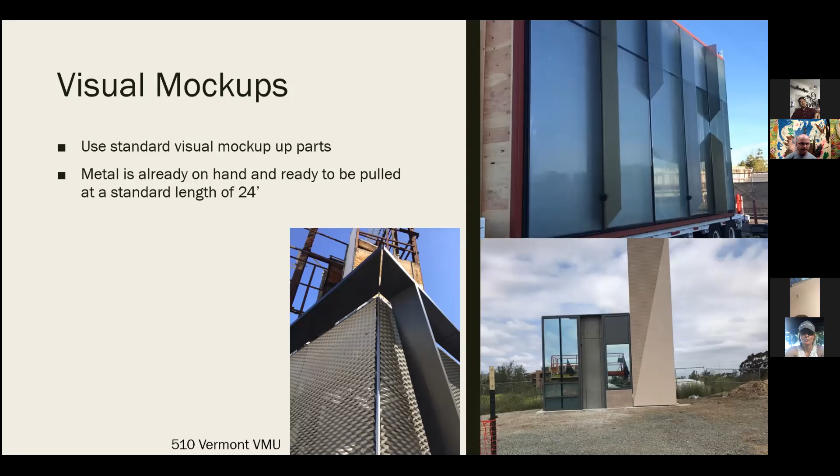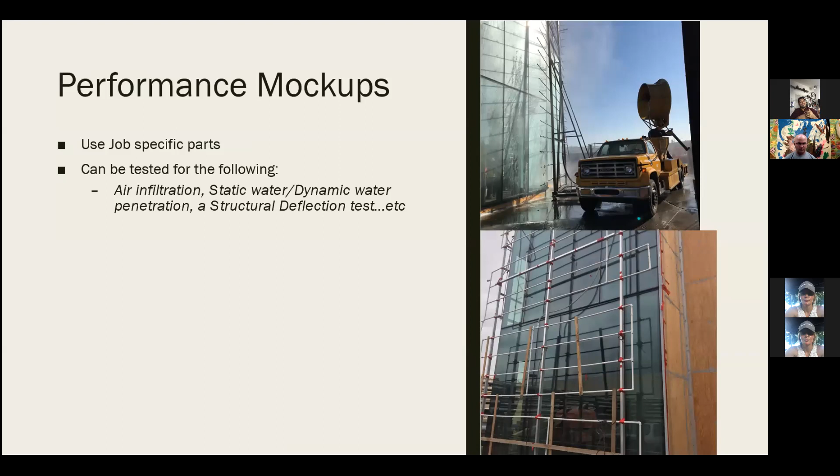So performance mockups use job specific parts. I couldn't find out which jobs I pulled these from, but here's one that's getting water tested, and they can be tested for the following: air infiltration, static water, dynamic water penetration, and structural deflection. And like I said, we try to carry as much information from these PMUs or VMUs with job parts over to the job. And then here's, I think this is O Street being tested out there.

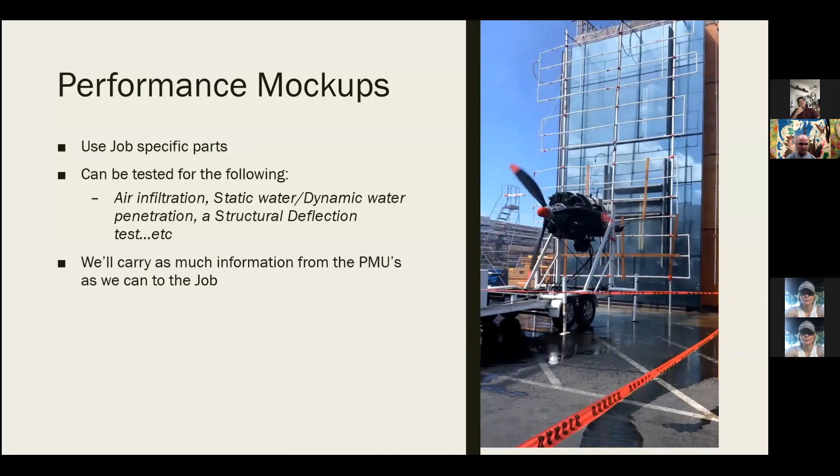And okay, so a comparison between mockups and jobs. So in a job, there's a pallet schedule, which mockups don't have, prototype units, metal and miscellaneous takeoffs, glass takeoffs, and fab. So each of these processes and steps gets handled possibly by a different project engineer. So there's a lot of work that goes into building up to that job.

And for mockups, there's a chance that nobody's touched it before the project engineer that's going to start on it. So that means that you have to start from the ground up, build the takeoff program, build the units, build the field use, and possibly build any brake shapes and anything of the sort if there's no other resource available at that time.

Okay, so an important thing to note is where those files that you need to start off are located. So if it's an LA job, are the shop drawings in the LA server? Are they in the J drive? Is there a Bluebeam session already set up for it? And if there's any doubt on where those files are located, the most up-to-date current, sometimes there's more than one mockup for a job. So I always talk to my PC, or maybe even reach out to the drafter just to see where all the latest and greatest information you need to get started is at.

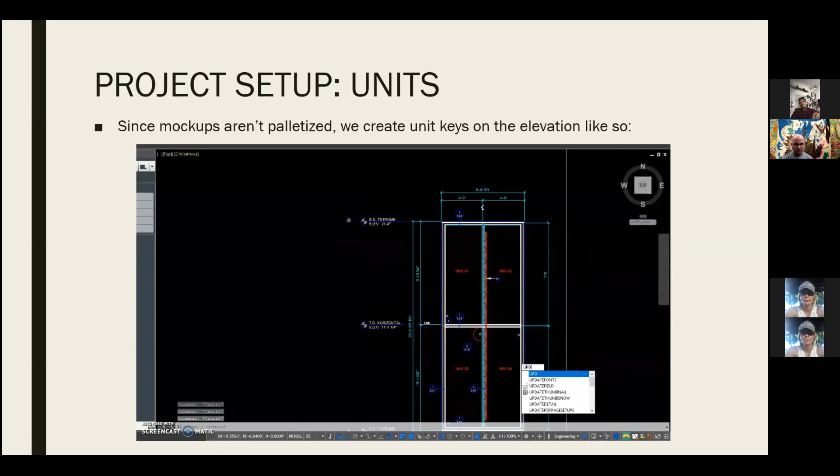Okay. So, the project setup for the units. We have different ways of grabbing information. I've created a standard visual mockup takeoff program that I've basically been building and working off of since I started building mockups. And as you can see on the description there, I have just a little note on what job I've used it on.

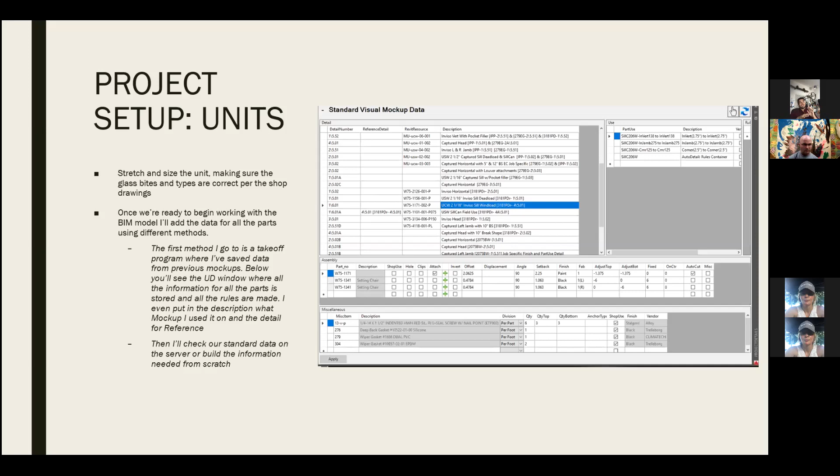For instance, that top one, 1552, I've used it on 279 East Grand, 3181. It's been a long time, I don't remember what job that is, but I used it on 3 different jobs. So I'll reference that if I need that particular detail. Or if I don't have it already created, I'll look for other mockups that I or someone else possibly worked on, and continue to build off of that and grab that information. And if no other information is available, we'll start from scratch.

Okay. And so the release process. As the unit fabs are being checked with metal and glass alongside them, and I believe we do this for the job as well, I'll go ahead and check my own miscellaneous. I'll create a little snippet of the general note sheet and go through each one, marking it off if it's on the shop drawings or not.

Sometimes there might be a fastener missing, a setting block missing, or something. Or maybe I included something on my miscellaneous that's not on the general note sheet. So I'll write a little note on there letting the PM know, if they were to look at it, that this is why I added it, it's on this detail, and so forth.

And for the release process, since I have quite a bit of time. Yeah, oh yeah, I have a lot of time.

So I'll go ahead and show the steps on doing the metal order and possibly the glass, and even the fab, since there's a lot of questions I get asked whenever someone else happens to work on the mockup. That way it's all clear, we're all in unison here. So let me go ahead and minimize this and open up my Takeoff program. Right now I have the standard visual mockup data open,

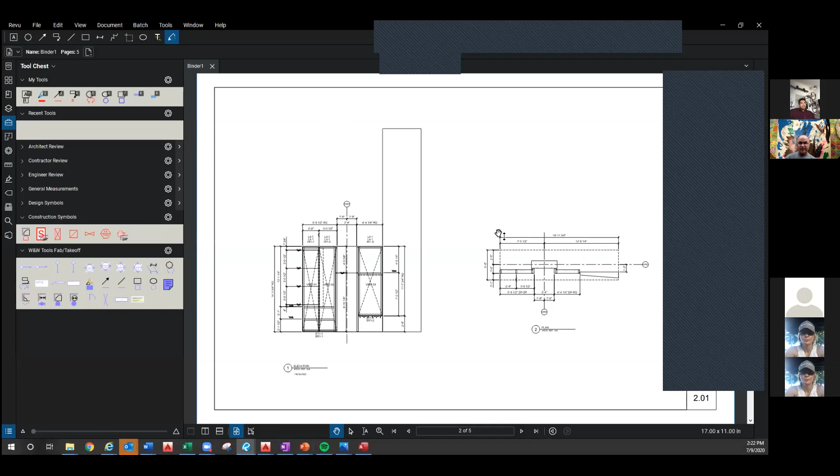So Edgar, can we talk a little bit about the visual mock-up system? You did mention that there's a specific set of drawings that you use. So do you have that available? Maybe we could look a little bit at that system and do some comparisons on how that is similar but very distinct from using actual job parts. Sure thing.

So here we go. This is it right here, the standard visual mock-up standard details. As you can see, even from the head here, we have this little alligator clip part, and all of it is just to mimic the actual job conditions, even though we might not use this part for the job. So we'll go through each detail and see the differences.

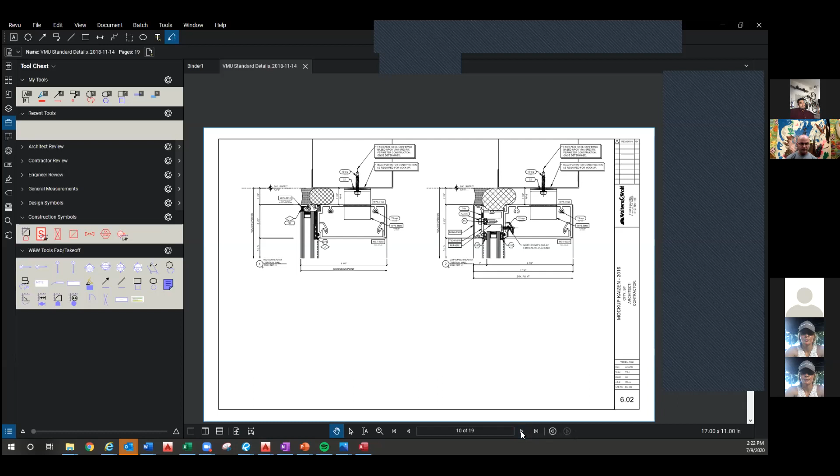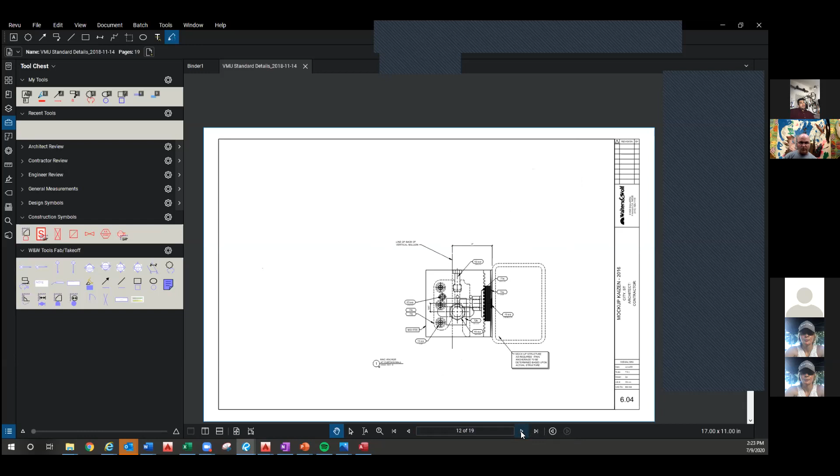So here we go, all pretty typical other than this sill here, the same as that head. On both conditions here, we have that alligator pressure adapter. So let me point out a few things. Go ahead and go back to that previous sheet.

The regular job material has isobars built into it, and that's a limiting factor on being able to paint materials after they've gone through the extrusion process. So we developed the visual mock-up system with a specific set of parts that we could stock. All of the mock-ups are done in the Laverne shop. They're close to Certified there, so we can send the fabs to their shop. They can get the material gathered, sent to Certified, painted, brought back to their shop with a very quick turnaround.

So we developed the visual mock-up system to be able to mimic the look of our W75 system, because in our previous iterations, we were always doing things like tubes and angles and channels and ripping parts, and the results we would get out of that were really inconsistent.

So we wanted to use something that simulated the look and the size and our approach for how the real W75 system works, but we had limitations from the actual parts of the W75 system. In order to create that quick turnaround cycle, we needed to generate these as parts that we could paint without having that isobar in there. So that's how this system came about, where it's got these little adapter pieces, for example.

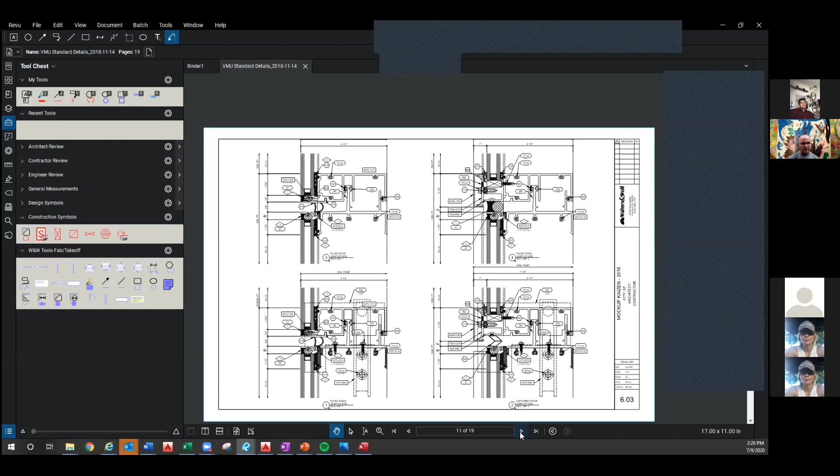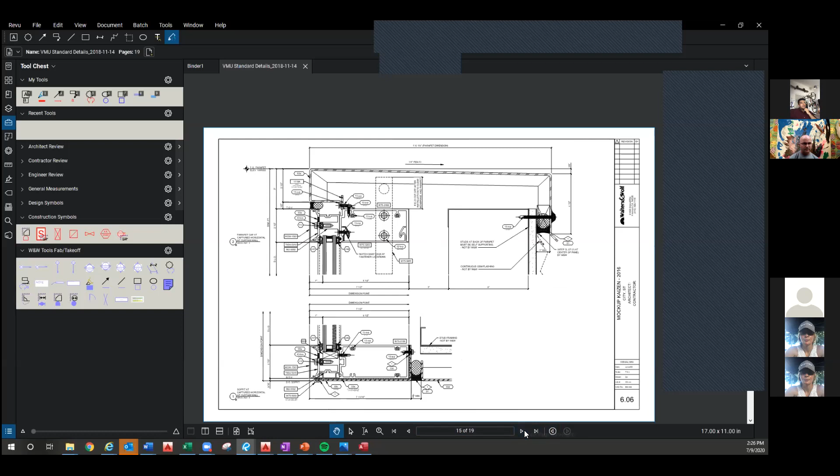Okay, so you can continue scrolling through the details to show some of the similarities to the W75, but also point out some of the things that are unique to the visual mock-up system. Okay. Looks like we have a pretty typical head and sill condition here. And once again, using that part there. And as you can see, that part's basically used for all the conditions, horizontals, verticals, and so forth.

So there on the detail 3, one of the ways that we wanted to be able to create the look of a job, but in a very fast turnaround cycle. Sometimes jobs have an extended cover on them. So we simulated a method to be able to show what an extended cover might look like. In this case, we are just attaching these brake shapes with fasteners to the vertical cover. We have the similar thing on the horizontal covers.

If we need to show them, we can do sharp corners. So we can do that compressed corner so that it mimics the look of an extrusion. And if that's the case, then we need to look at the timing of these as well so that we make sure that the painted brake shapes get painted at the same times the extrusions do. Because it's a smaller batch of material, we want to send it through to the vendor and get it painted and get it back to the shop all at that one pass through the painter.

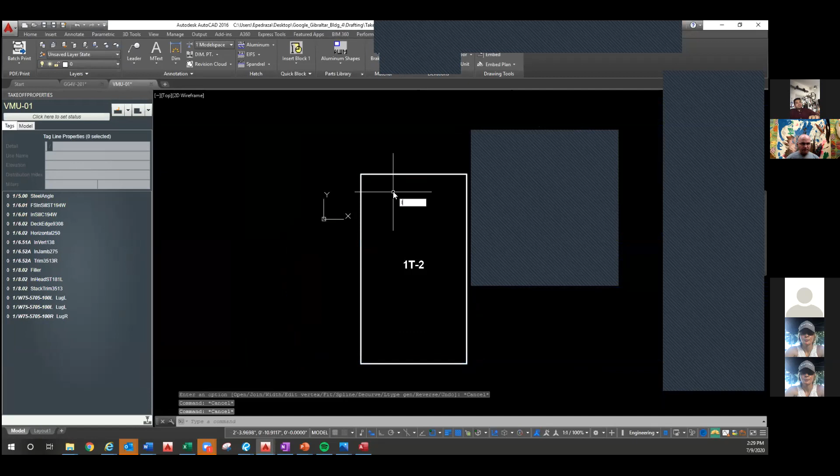So I can pull up a unit here. So I have the units and the glass all here. So I can go in here, stretch the tags, and make the adjustment to the bite as necessary for the shop drawings. And I'll go ahead and UAD and run it out as such. Okay, and then I'll just keep going through. Hopefully that answers your question, Jana. I'll just keep going through the details here.

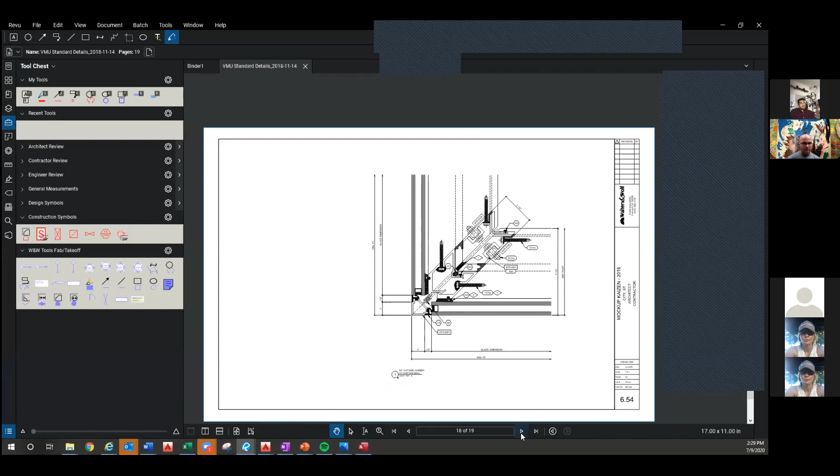So we have a 90-degree corner, and that's basically it. Let's see, is there any other questions or any other suggestions? One of the other things to point out about the set of details is we did develop the visual mock-up details that can handle a strip window or a curtain wall. So we have different series of details even in the visual mock-up. And a lot of them are using very similar parts. We wanted to limit how many parts we needed to stock to be able to accommodate it. So far it's been working out very effectively.